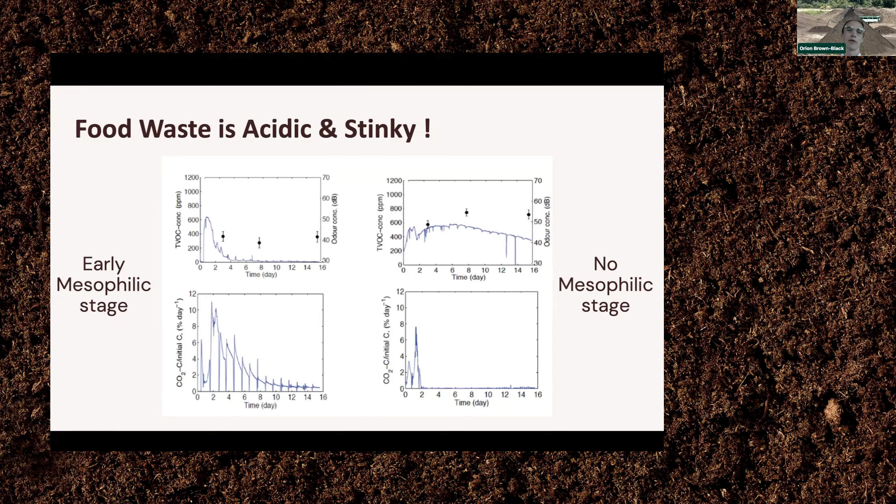So yeah, I want to take some time. It's such a huge topic, but I figured we'd spend a little time looking at contamination and some contamination mitigation strategies, because that's really the hot topic with food waste composting.

And as I was saying, where the waste comes from really matters. So it's important to think about where your food waste is coming from when you're designing your facility. And the primary goal for you should be just to keep contamination away if possible. And that comes down to education, communication, getting the right waste streams.

As I talked about earlier, not all food waste streams are the same, and the amount of contamination is going to be different. Engagement, education, communication, all these things really help with your hauler, with the folks that are, if it's an industrial producer or pre-consumer producer or a restaurant or whatever it is, the more you can talk to them and provide feedback, the better the contamination thing's going to get. And then have a plan, because it is a problem, and it's better to actually plan for it than to be surprised when it shows up.

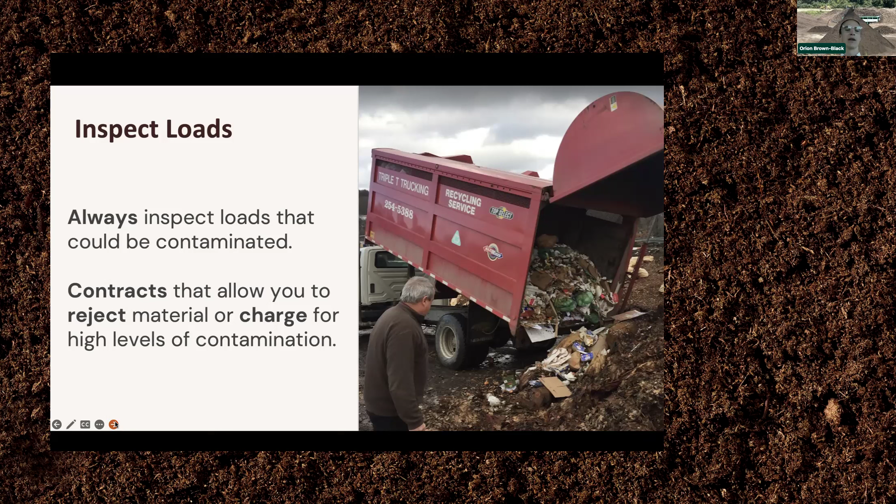And then it's also important to have contracts and language set up with the folks that are bringing waste to your facility that allow you to reject material if it's over a certain contamination level, or charge them if it's too high a contamination level. This will keep people accountable and also keep you in compliance with your permits, because a lot of the permits in North Carolina have contamination thresholds. So this is a really important stage, and it's also important to the continuous improvement in the amount of contamination you experience. Next slide, please.

The next thing you can do is pre-screening. Typically a pre-screen process is done before grinding. You can do what's called a floor sort, where you dump the material out into windrows, or spread it out with a bucket loader. Then you walk through and try to pick out large friable material. You're not going to get all the material out typically with a pre-screen, but you want to focus on things that, if you put them through a grinder or shredder, are going to turn into serious contamination problems, like glass bottles, friable plastics, tires, metal that could damage your grinder, and so on. You can also do this with a pick line, which optimizes it a little bit more.

There was some interesting work done by Atlas Organics. They had a facility in Texas that was looking at using AI-powered robots to remove plastics and different contaminants versus humans. They ran the robots for about 5 years and collected a lot of data. At the end of it, they determined that the robots didn't actually make any financial sense. They were too ineffective and ended up costing about the same, if not more, than a human doing the picking work. So unfortunately, there's not really a way to automate around this at the beginning.

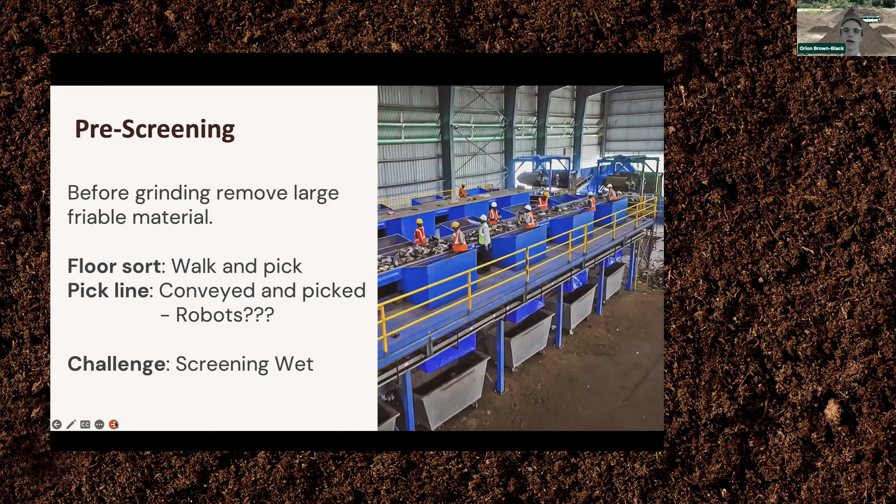This is super important.

And this kind of gets into what I was talking about with the pre-screening, but when you're thinking about how to manage contamination, it's really, really important to not amplify your problem. And the ways that you can amplify your problem are primarily by turning every single piece of plastic you have into 20 or 30 or 50 pieces of plastic. So the goal when you're composting anything that's contaminated is to keep your plastic as large as possible and to not turn it into more and more pieces of plastic.

So some ways you can do that are you can remove things before grinding. You can try to bypass grinders with heavily contaminated loads and just mix it into your shredded carbon. You can use low-speed shredders instead of high-speed grinders. This will significantly reduce the amount of milling that happens. And then also if you're doing composting in windrows, look at purchasing a low-speed windrow turner. So the speed that that drum turns, that's going to have an impact on how much you mill the plastics.

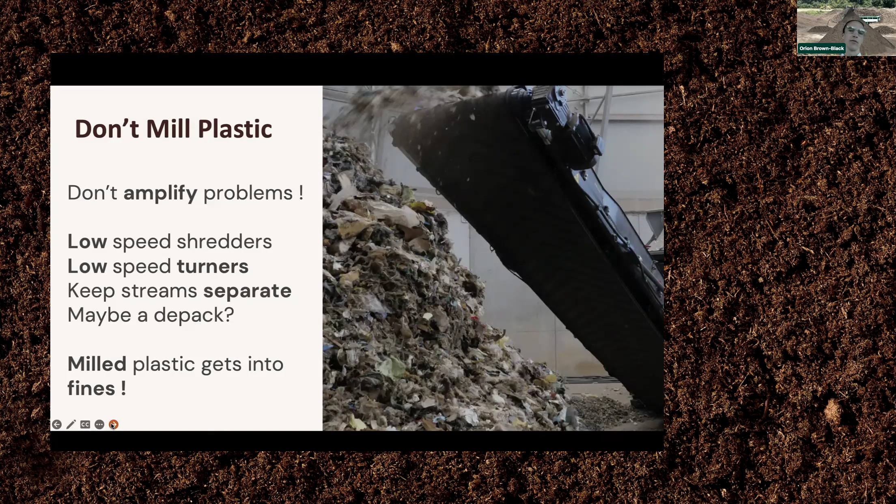And then if you have a really, really contaminated waste stream, you could look at using a depack to remove some of that contamination before the composting process. And as I said, this is super important. So when you're looking at the screening, we can stay on the slide. When you're looking at screening, it's much, much harder to remove a lot of small pieces of plastic than it is to remove big ones. And so that's why it's super important not to mill the plastic.

And then screening, this is kind of the tail end screening when you'd be screening your fines and your overs and separating them in that way. Typically you have a lot more success screening on the tail end of the composting process because you've evaporated a lot of moisture and the material's dry and it screens much more effectively. There's 3 ways you can get plastic out of a waste stream. One, you can just put it through a typical screener. And if you screen to like a 1/4 inch, all the plastic that's larger than a 1/4 inch, which if you've done a good job not milling it, will be the majority of it, will come out. But you'll end up with contaminated overs, which could be 20% of the mass of this waste stream.

So there's some technologies that have come out that can help mitigate that. One is called a wind sifter, which is pictured on the right. And basically what that is, you have this chamber, that green kind of tarped area. And as the material comes off a conveyor, there's this set of air jets that blows up at the material and it pushes any light material up into that chamber. And then you have a vacuum that pulls any of the light material off. So these can do a very effective job for removing plastic contamination if they're operated correctly. And it's mostly lighter plastics that they're super effective at removing.

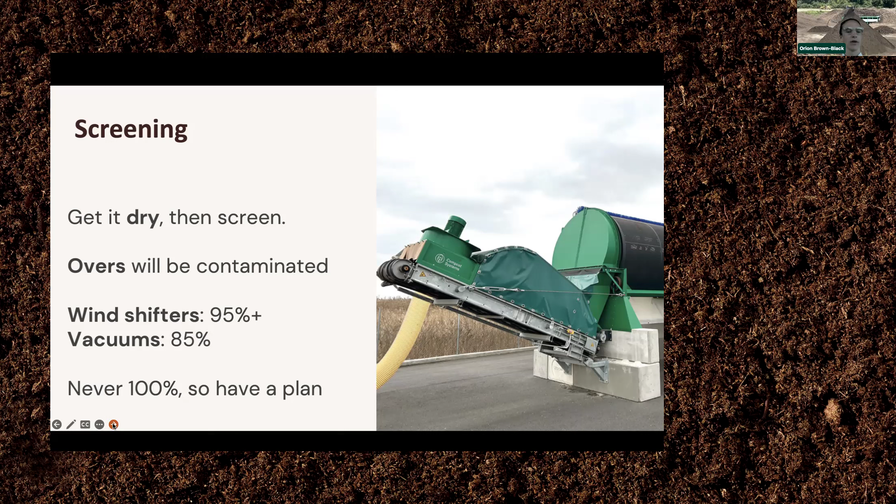You can also just use these vacuums by themselves and put them at the end of a screener or something like that. But they're definitely considerably less effective than a wind sifter. And it should be noted that both of these technologies are not 100% effective. So you're still going to end up with most likely some contamination in your overs. So have a plan for what you're going to do with your contaminated overs. Maybe landfill cover can be a great application. But think about that when you're thinking about your financial models around food waste composting. Next slide, please.

So quickly, I'm just going to talk about a few different composting technologies that we commonly use for food waste composting. And I'll try to move through this quickly so we have some time to speak with all the panelists and ask some questions. Next slide, please. First, I want to point out that typically with composting, 50% plus of the cost of running a facility is labor. And especially if you're looking at running a front-end loader or a grinder or something like that, these are very, very large expenses. So the way that you compost is super important to the long-term financial sustainability of your facility, and the way you design and lay the whole thing out is all really, really important. Next slide, please.

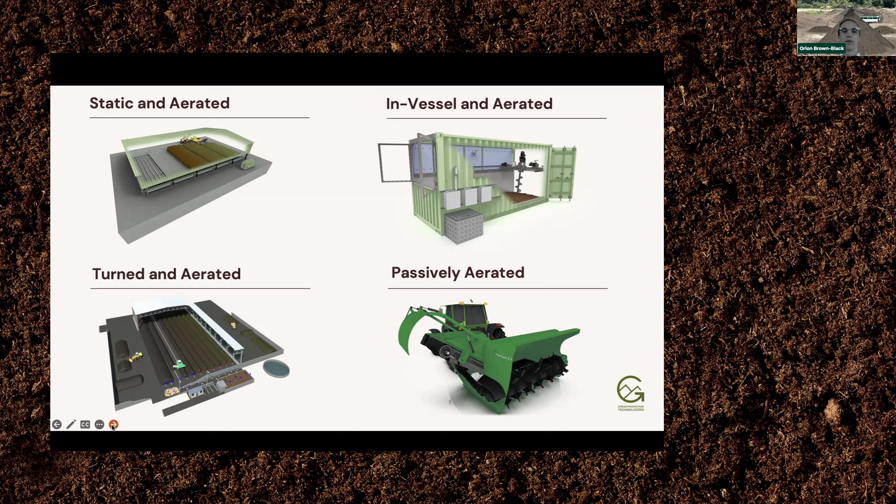So basically, if I were to just break it down into 4 categories, there's these 4 different ways you can compost. One is static and aerated, the next is in-vessel and aerated, another is turned and aerated, and then the last is just turned or passively aerated. And we'll quickly touch on each of these in a little bit more detail. Next slide, please. So aerated static piles, this technology is basically you pre-mix and grind and you get everything to the right kind of homogeneous blend, and then you put it onto a series of pipes and you aerate it, and that keeps the aerobic conditions that we were talking about.

The biggest advantage, I mean, I'd say ASP is pretty good across the board. It's got good odor control, reasonable capital cost, and you can process a lot of waste with it. But typically the ops cost is pretty low with ASP because the process is static. So you're not touching and moving it a lot. So that's one of the big benefits of ASP.

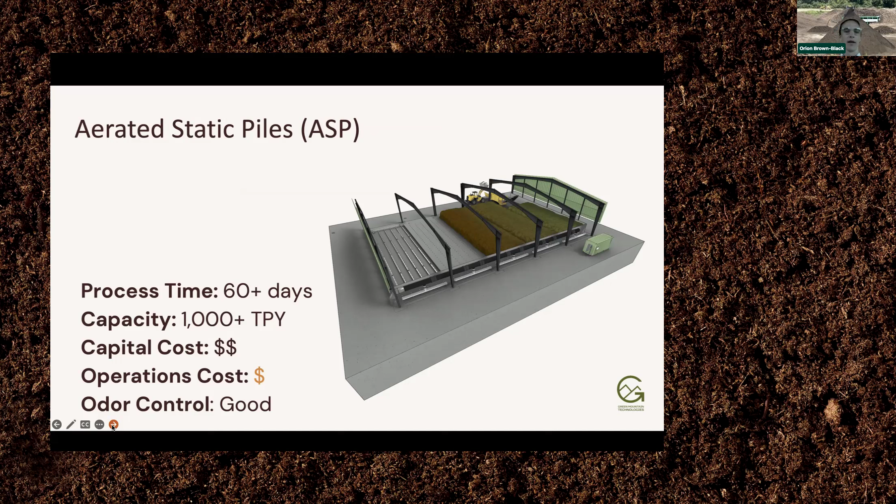Next slide, please. Another way to do ASP that's a little more cost effective, especially in North Carolina. One thing that's interesting about North Carolina is in most states, once you start touching food waste, you have to be on an impermeable surface, at least on the West Coast. Whereas in North Carolina, you just need to be on a finer than loamy sand soil type. And so you can compost food waste, certain types of food waste, without actually putting down an impermeable surface.

And if that's the case, pipe on grade ASP can be a really cost-effective approach there. And basically, this is the same concept, except as you can kind of see in this image, the pipes are sitting on the surface of the ground instead of being embedded into concrete or asphalt. And that just lowers the capital cost quite a bit. So just wanted to point out that there's also this technology.

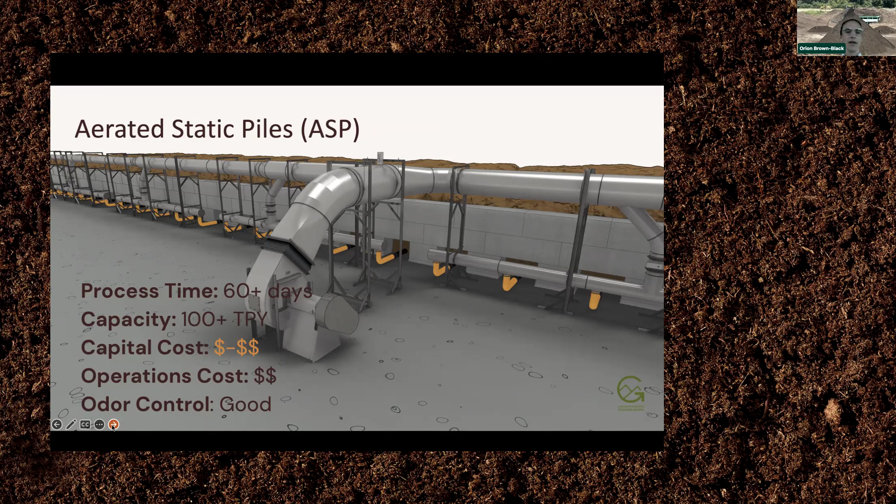Next slide, please. Compost covers, there's a variety of different covers. There's fleece covers, geomembrane covers. You can use a tarp. So there's all sorts of different covers. Some of the benefits of covering is that it can keep moisture in and out of the compost pile, so it gives you a little bit more control. And it can also, if you're using a geomembrane cover, provide odor control.

One of the downsides, especially with geomembrane covers, is they can be pretty expensive, and that you also have the added operations cost of putting them on and off. And also they limit the amount of air you can get through, so it typically makes the process time a little bit slower. Next slide, please.

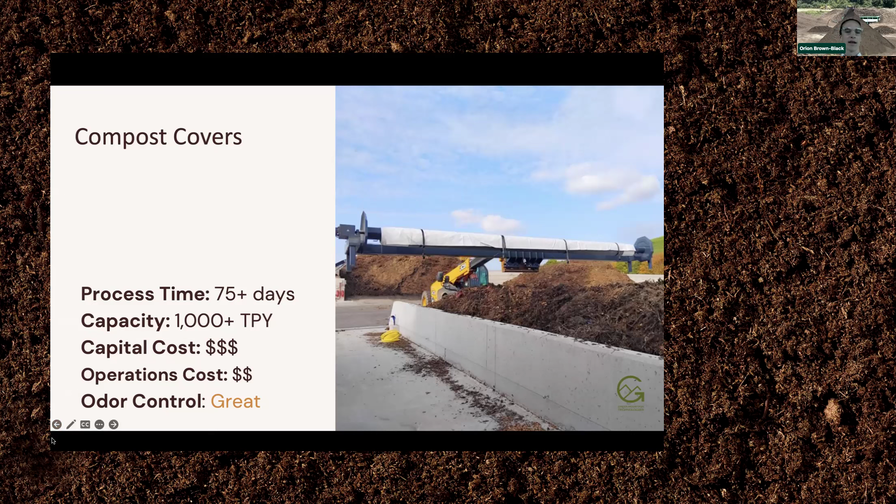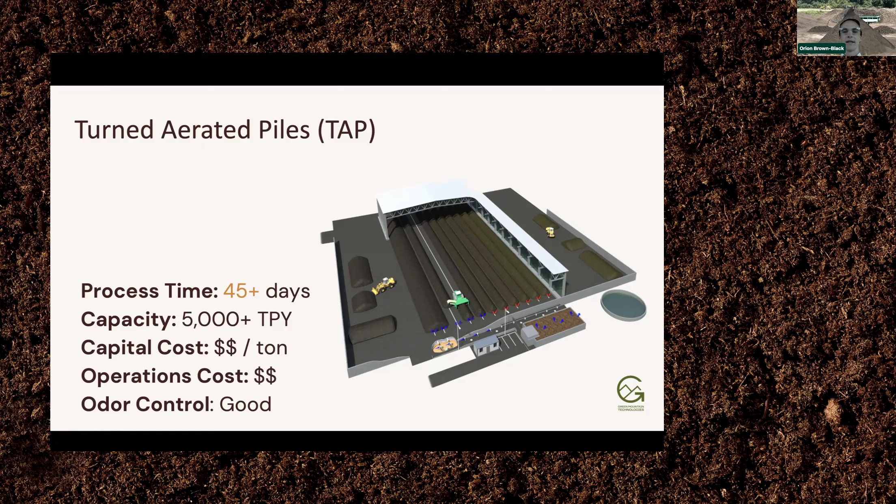Turned aerated piles, this is probably my favorite way to compost. I'm slightly biased, but basically this is where you aerate, and then you're also using typically a side discharge turner, but it could also just be like a standard straddle windrow turner. And so you have the benefits of both using a windrow turner, that kind of rehomogenization and mixing, and also the benefits of doing ASP. And this allows you to make really, really high quality compost pretty quickly. And yeah, I'll leave it there for now. Next slide.

And then there's in-vessel systems like tunnels, or you can compost in a building. I know McGill has a lot of experience with this, and maybe they can share a little bit more. But one of the big advantages to in-vessel composting is that you have really, really excellent odor control. So this allows you to compost in more densely populated areas, in stricter regulatory environments, so on and so forth. Oftentimes people that are composting the organic fraction of MSW will use an in-vessel technology like this just because it's so much more strictly regulated. Next slide, please.

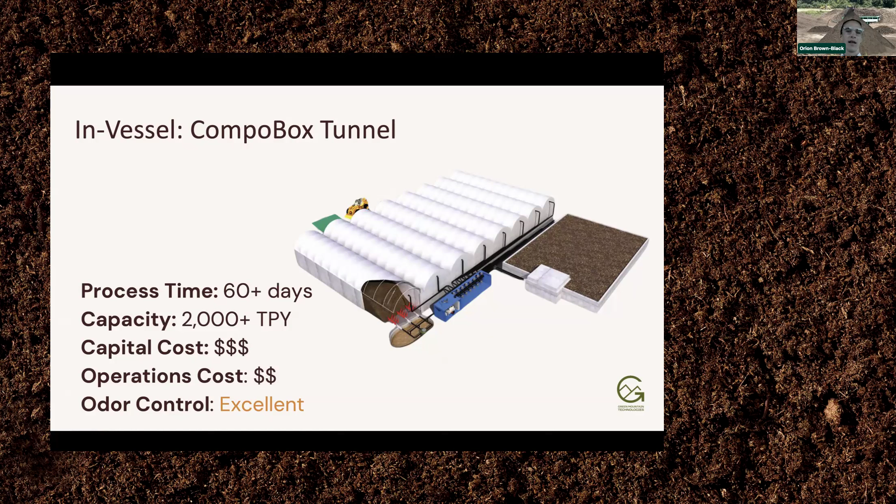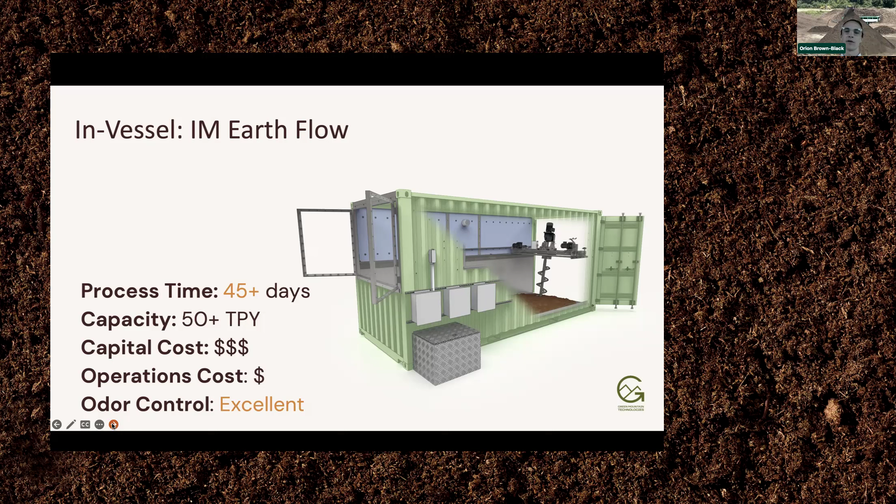Then there's also just small kind of in-vessel systems. One that we offer is the Earth Flow, but there's also drums and all sorts of other technologies. Not dehydrators, those are not composters, sadly, but they kind of serve a similar function. So yeah, these use some sort of mechanical apparatus to automate a portion of the composting process, and they are by definition completely enclosed, which allows you to keep leachate out and also contain odors. So these are typically pretty good options if you're looking at processing a small amount of food waste and you want to do it close to the source in more populated areas.

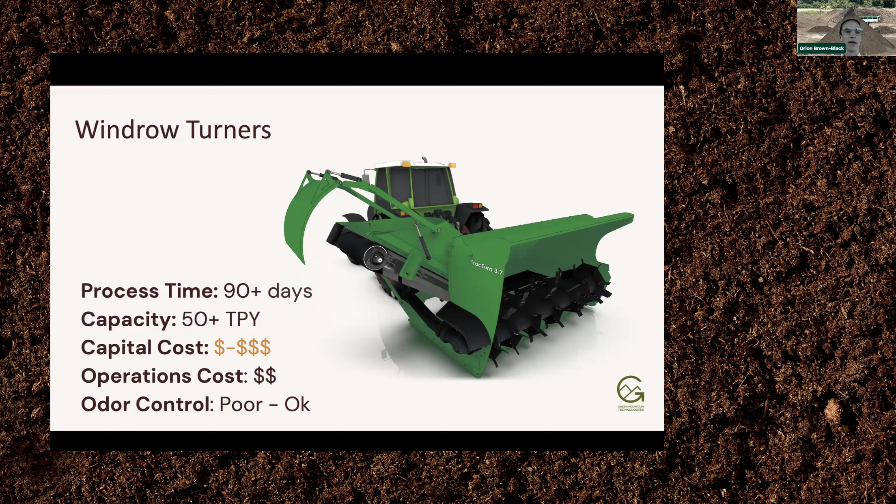And with food waste, this is typically the case if you have to put the composting process on an impermeable surface for regulatory reasons. And if you have to go to an impervious surface, then doing windrow turners typically doesn't make sense because the footprint is so much larger. And that means you need to put down a lot more concrete or asphalt, which ultimately ends up being more expensive than other types of technology. Yeah, next slide.